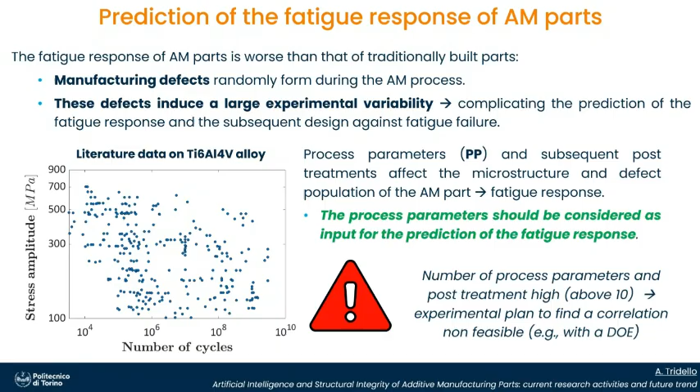So the process parameters should be considered as an input for the prediction of the fatigue response. This could make the process more efficient, okay? But we have a large number of process parameters, and we cannot find, for example, a design of experiment to find the relationship between the process parameters and the fatigue response. It's very complex, it's not feasible, and we don't have the money to do it.

So the objective of this first activity is to develop a methodology which allows us to safely design AM parts with topology optimization algorithms, but this is in the last framework that I will present. But the first thing is that we want to start from the process parameters by exploiting the potential of machine learning algorithms. So here I report the process parameters.

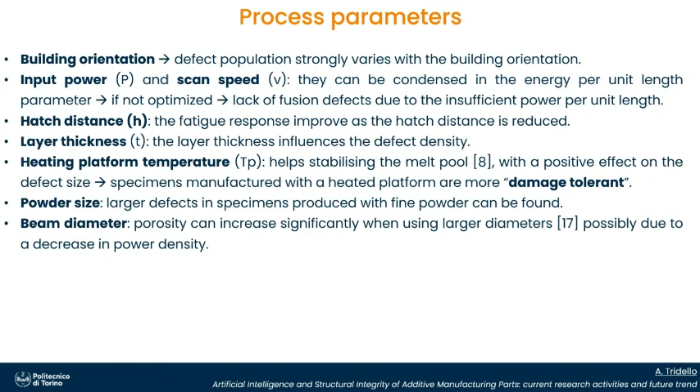We rely on literature data, so we consider the most important ones, and the ranges are those available in the literature. We also consider the heating temperature to take into account the heat treatment, and also surface finishing processes. And we consider them as Boolean features. So if the process is present, we set the Boolean feature to true, otherwise we set it to false.

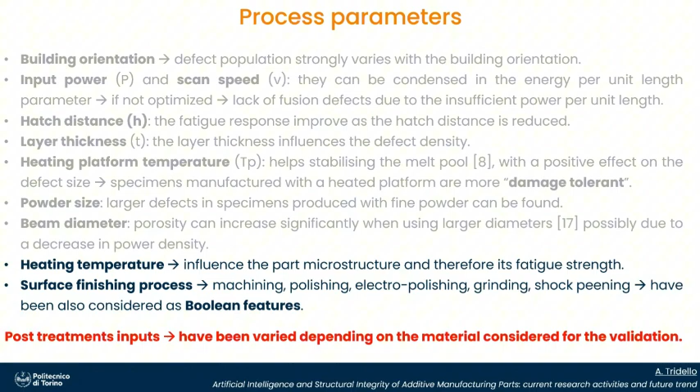Okay. The post-treatment input can be varied depending on the material considered for the validation, since we have validated the algorithm on different materials, and we have to trust the data that we have found in the literature. Okay. So we mainly use neural networks. This is a very brief introduction to neural networks.

They are operators that replicate, in a general view, the brain structure. They have a layered structure. Each layer is composed of different neurons fully connected between them. Then we have to tune these parameters in order to replicate the relation between the inputs and the outputs. Okay. This is a very straightforward approach. This is a black box approach. But it has a main drawback.

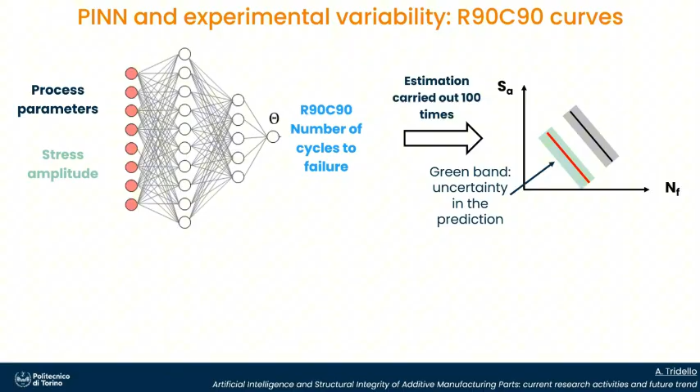So to conclude, with this approach we can separate the experimental uncertainty from the uncertainty in the prediction. Okay. The R90C90 curves, which have been considered in the training dataset, model the variability intrinsic to the fatigue phenomenon and the uncertainty in the estimation process, since we can have a dataset with less data. The iterative prediction with the neural network models the uncertainty associated with the neural network prediction. Okay, so this is very good for fatigue, since we start from literature data, and we can have variability in the prediction.

Okay, now that we can predict the number of cycles to failure, how can we integrate this into a design process? We have developed a framework. We have included all this information into a framework which exploits topology optimization, in which we can start from the process parameters. So the inputs are the process parameters. The machine learning output provides the R90C90 stress amplitude at a defined number of cycles. We have to decide which one. And this is the input for the topology optimization process.

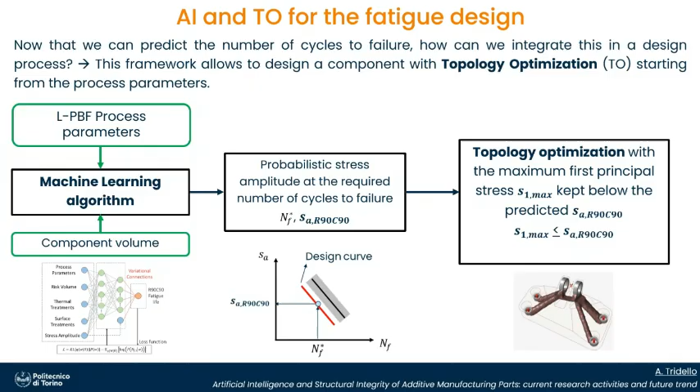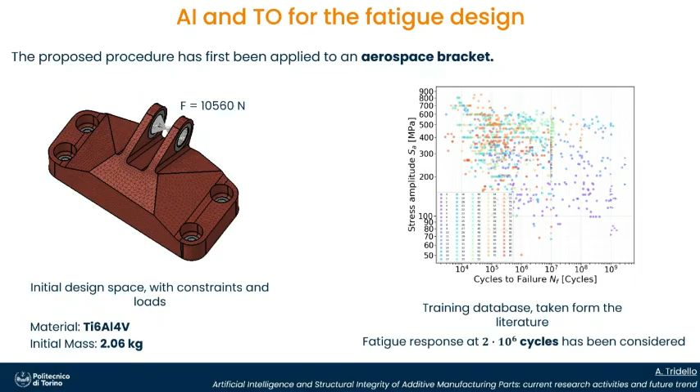So we have validated this with this bracket that you find in the literature, with this material, titanium. This is the training data set taken from the literature for the titanium alloy. Here you can see where we have selected the number of cycles to failure, okay? And here are the results. This is the component which is optimized against fatigue loads, starting from the process parameters. So the first principal stress is kept below the limit stress.

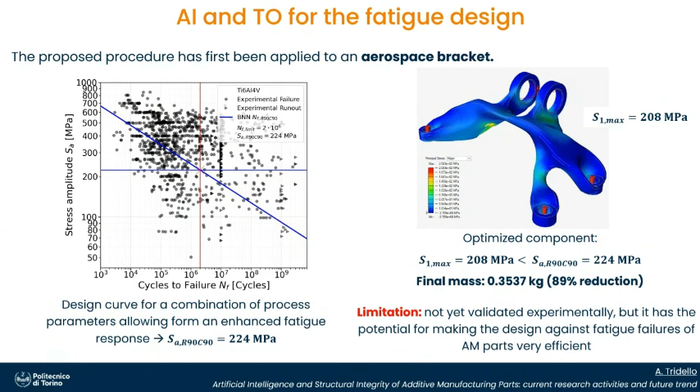We have obtained a final mass which is well below the initial mass, and this is very good. But the most important thing is that if we want to produce these components and we have a set of process parameters, we can take into account directly before the optimization process which is the limitation. We have not yet validated it experimentally, okay? But it has the potential for making the design against fatigue failure of additive manufacturing parts very efficient, which is something quite new and not considered in the literature.

In this way, the latent relationship learned from the previous alloy is preserved, and the last layer, which is free, can adapt to the new training data for which we have less data. So we can try to exploit the relationship learned from other data sets for which we have more data.

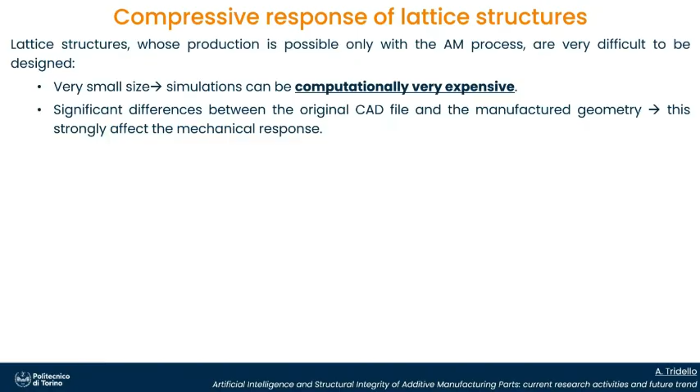But they have some drawbacks. They are very small, and the simulation can be computationally expensive. And we have significant differences between the original CAD file and the manufactured geometry. So this strongly affects the mechanical response. We'll focus on this octet truss lattice structure.

Here you can see the two main defects: internal porosity defects, here some taken at the J-TECH Center in Politecnico, and here the surface roughness of the beam, which have an influence on the compressive response if we want to absorb energy.

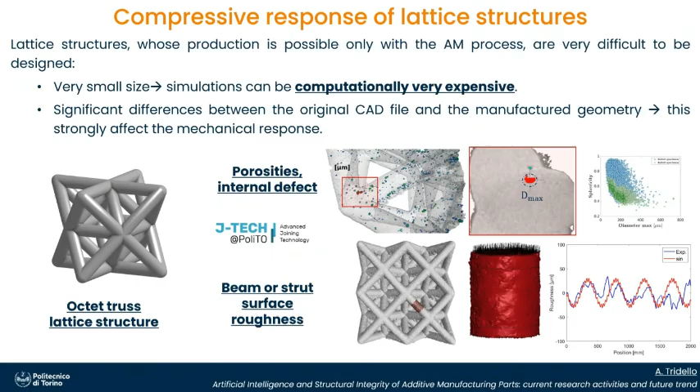We developed a multi-scale approach. Our objective is to define a simplified methodology. This small portion of the beam contains a defect and a surface roughness. So we would like to model the effect of defect and surface roughness on the stress-strain curves. Then we put these stress-strain curves into a specimen, which was also tested experimentally, to verify the influence of these two deviations from the original CAD file.

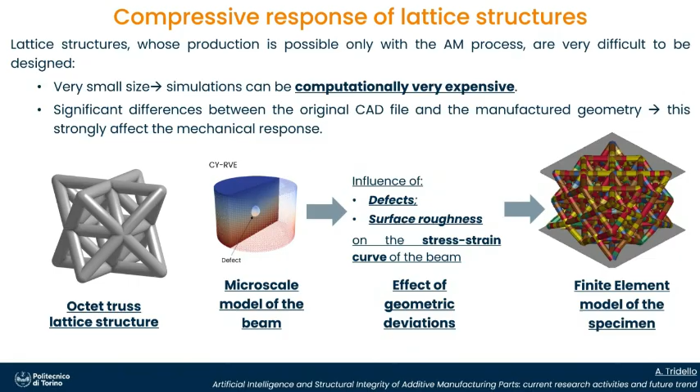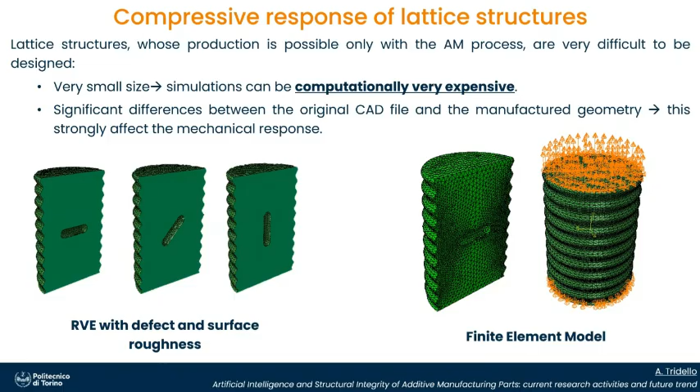This is the finite element model of the specimen. Here you can see the RVE with the defects. We take into account also the orientation of the defect. Here you can see the different stress-strain curves due to the presence of the defect and a specific roughness. Then each element has been assigned a random stress-strain curve, which derives from a specific roughness and a defect.

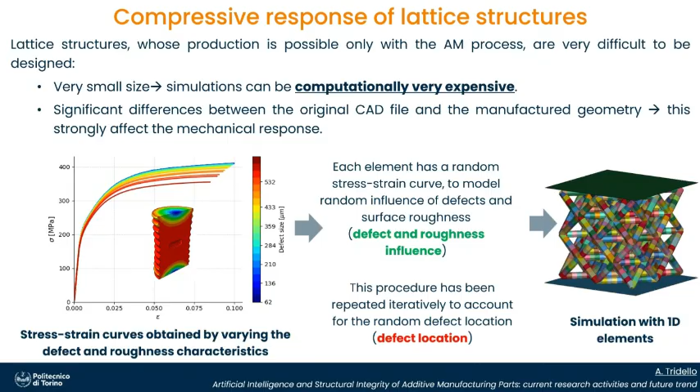We made a simulation with 1D elements, and the procedure has been repeated, varying the position of these elements in order to take into account the random location of defects. We don't know where defects can be at the beginning. So this is the comparison with the experimental data, and you can see that we obtain a good prediction, and we have a scatter of the curves due to the presence of defects.

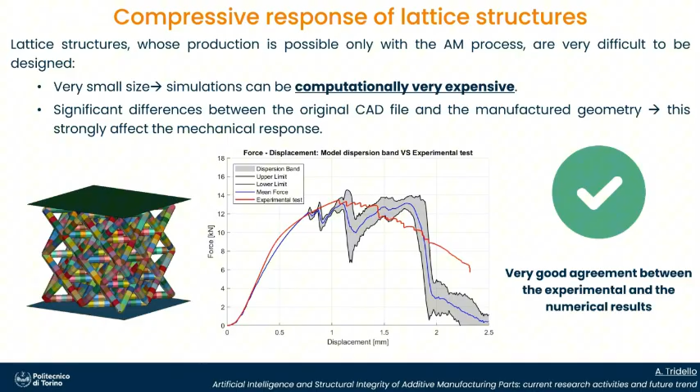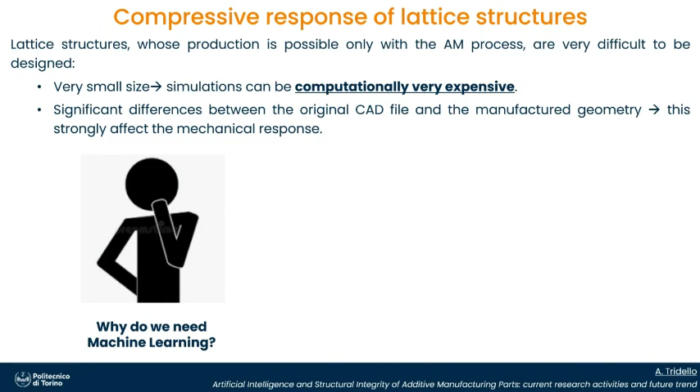But why do we need the machine learning? This activity seems to be completed, okay? The statistical multi-scale approach requires multiple finite element analyses of the beam, and the variation of the defect characteristics and of the roughness requires a new set of computationally expensive simulations. So machine learning can be used as a surrogate model to estimate the stress-strain curves from defect characteristics.

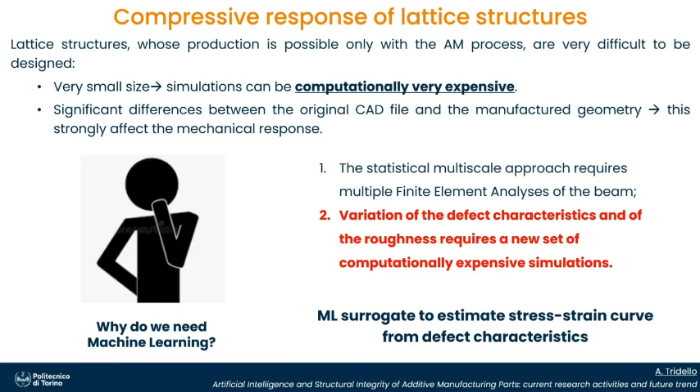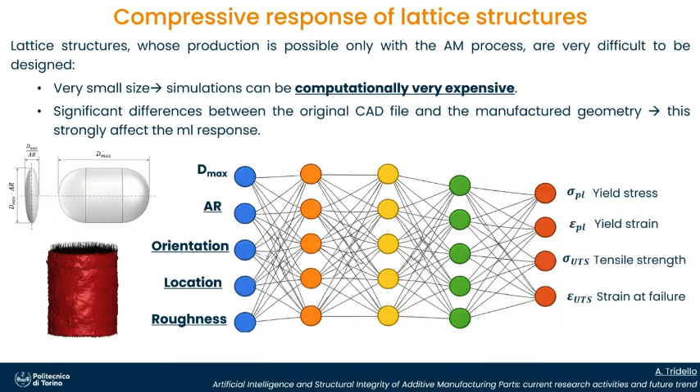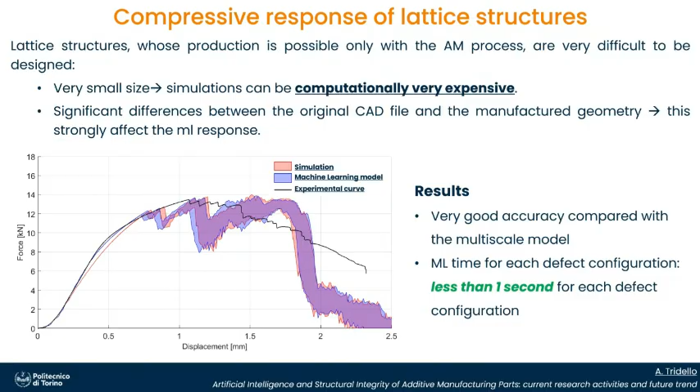And here you can see the red curves are those obtained with the simulation, and the blue ones are those obtained with machine learning. So we have a good prediction, very good accuracy, but the machine learning time is less than 1 second for each defect configuration. If we simulate it, it takes a longer time, okay?

So let's try to conclude this presentation. The main question is, is artificial intelligence truly useful in supporting the design and structural integrity of additive manufacturing parts? Or is it just a trend, or a moda, as we say in Italy? Machine learning and artificial intelligence can manage multivariate and complex problems, and can do so very effectively.

Indeed, we have shown that the prediction of the fatigue response starting from the process parameters is not possible with other methodologies, and in particular, it would not have been possible to explore the literature data, and it can also be integrated into existing approaches. So it can be useful and support the design, and make this design process more efficient.

Then we have seen that AI can also be used for surrogate models. We can use multi-scale approaches, which are very effective but may involve high computational time. AI can predict the relevant properties in a negligible time by training the algorithms on synthetic data. But the simulated data, I would like to remark, should be validated experimentally, and this can also be used for metamaterial design, but I have no time to show some applications.

So, in my opinion, the answer is yes. AI can support the design and structural integrity assessment of parts. It allows for a more efficient and effective design process, beyond what is achievable with traditional methodologies. And it is up to the researcher to select the proper areas for AI. Otherwise, it can be useless. This is an important conclusion. Another conclusion: we need trustworthy data to obtain reliable and accurate results. If we don't have good data, we cannot make good predictions.

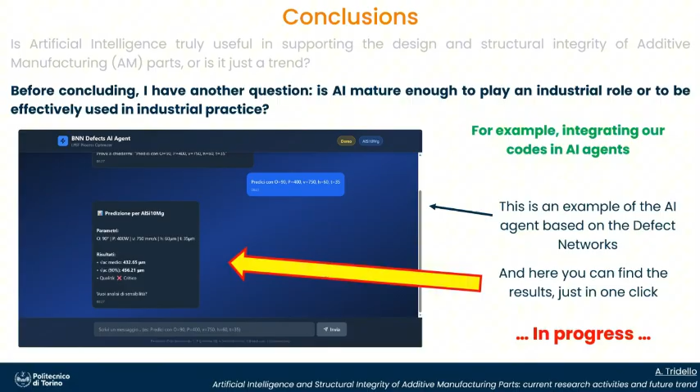So if we have a tool like this, also for industrial applications, we can exploit and boost the diffusion of the algorithms that we have developed. But this is in progress, and this is a very, very recent activity.